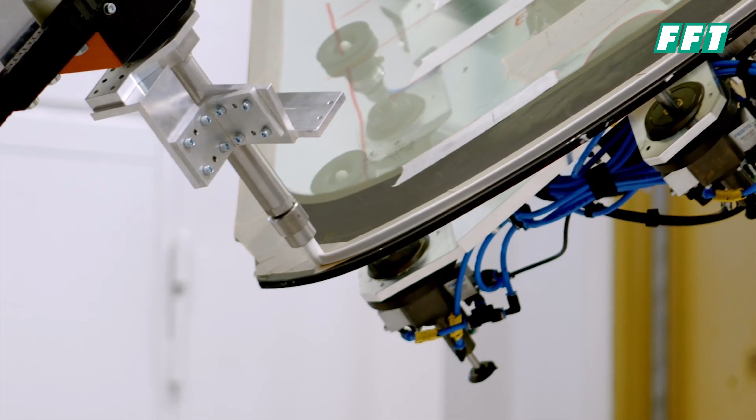But before we start, I will give a short introduction into the basics of hemming. The hemming process itself is defined as mechanically joining sheet metal parts by forming.

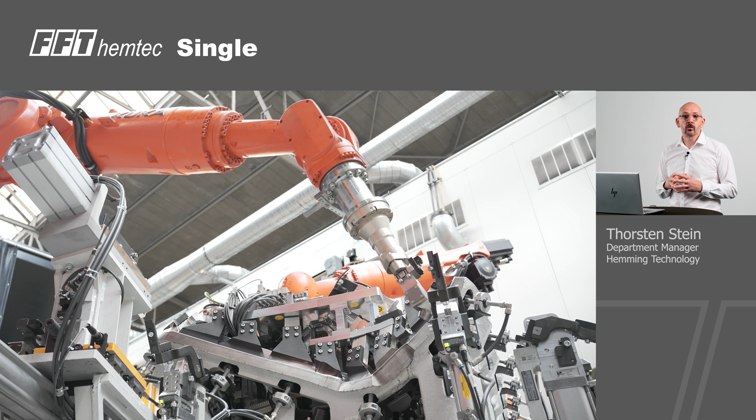The FFT hemtec Single is designed to be mounted on an industrial robot to perform the roller hemming process in several stages. The main advantages of the process are short commissioning times, easy and fast adjustments directly through the path programming of the robot to constantly optimize the quality, also using the same roller hemming system to produce different types of parts in the same manufacturing line. To run our purely mechanical system on an industrial robot, no additional media supply is needed.

We are using 3 standard versions of the system to find the best solution for your individual requirements, taking into account part analysis, hemming method planning, layout definitions and cycle time evaluations. The FFT hemtec Single S is a spring suspended hemming head with force measurement. The FFT hemtec Single F is a pure rigid hemming head. The FFT hemtec Single Y is also a spring-loaded hemming head, also with force measurement, and it is used for highly cambered parts.

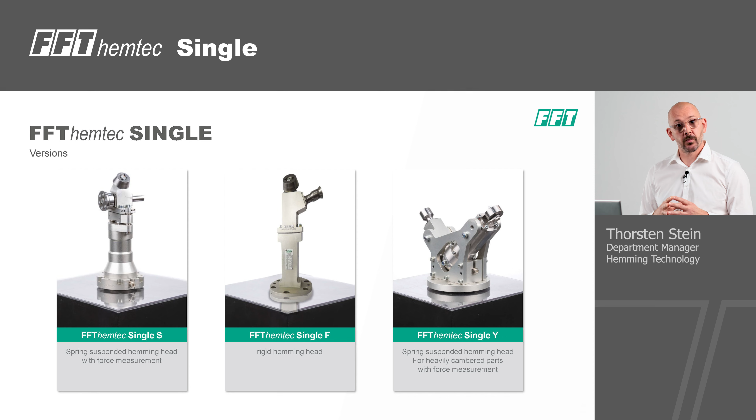Let's talk about the spring-loaded system and the force measurement. The spring-loaded system is designed to perform as a rigid hemming tool during the pre-hemming operations, where high accuracy is needed to define the final geometries of the produced part.

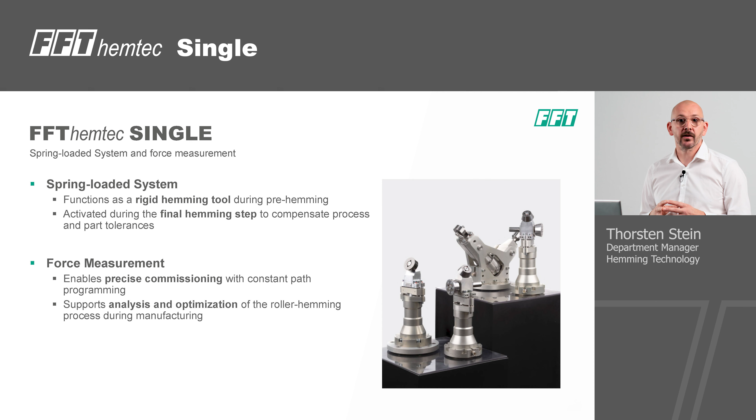During the final hemming step, the spring-loaded system is activated to compensate process and part tolerances. The advantages are highly reducing maintenance and quality adjustment during the production lifetime cycle. The force measurement sensor is a very useful application to perform a precise initial commissioning with a constant path programming. It also helps to analyze and optimize the roller hemming application during the manufacturing process.

The modular design of the FFT hemtec Single S and F creates a large variety of different configurations to find the best solution to our customer demands. The standard hemming geometries like flat hem, rope hem and precision exterior can be realized out of this modular system, no matter if we have to produce steel or aluminum parts. The slim design creates a minimal interference zone to enable maximum space for the fixture and downholder design.

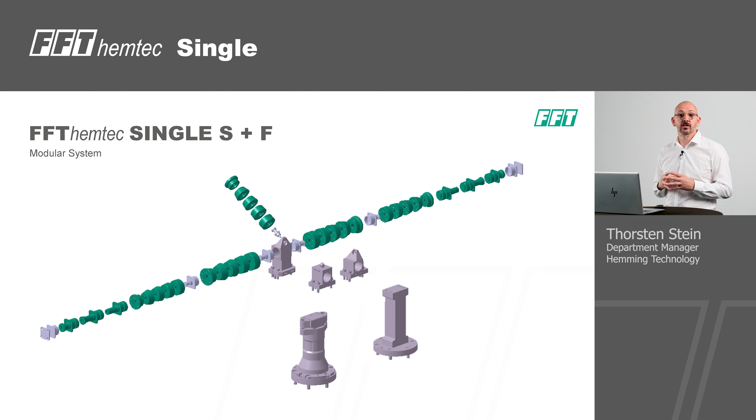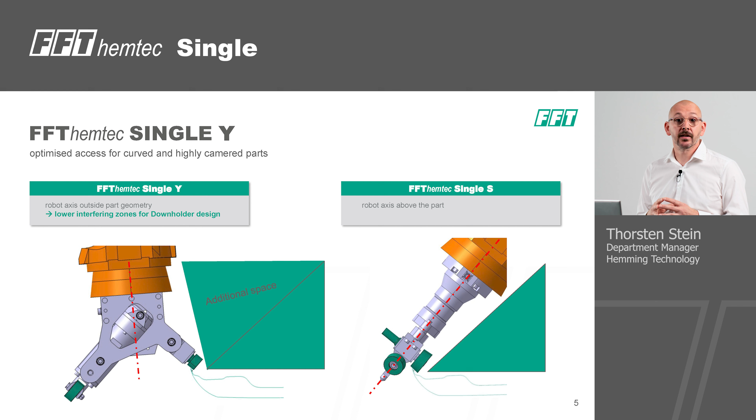The FFT hemtec Single Y was developed to hem highly cambered parts. The tool enables more space for the downholder design and improves the robot reachability.